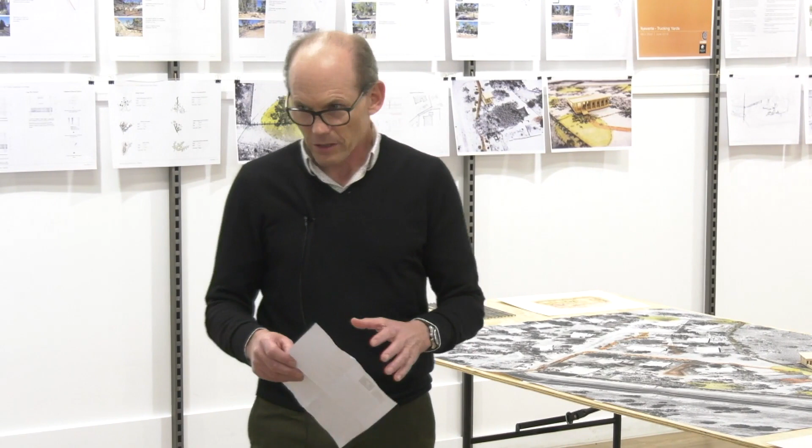So welcome everyone to the fourth year of what we call Essential Infrastructures. It's a partnership between Tangentyere Design and the University of Newcastle School of Architecture and the Built Environment, and it's a collaborative effort that tries to bring together the talents of emerging architects with the visions of town camp residents to try to create better places that we all want.

And of course, it's in this place, in Mparntwe, Alice Springs, that this relationship begins to unfold and come together. And it's here where, of course, we have to pay our respects to the Central Arrernte people and their elders past, present, and future. There's an exhibition down at Araluen, I don't know if you've had a chance to see it.

It just opened last week. It's a ceramicist called Mel Robson, and her work is all about mapping and place. And I think the idea of mapping is certainly something you will see in today's exhibition.

And there's a quote at Mel Robson's show by a woman called Sarah Willard Gray, who says this - just bear with me for a moment. Mapping, she says, is a shared form of knowledge, and therefore provides a common ground between different human cultures, a means by which each can communicate to the other something about their relationship to a certain place.

So it's this idea of mapping, I think, as shared knowledge that seems to capture what this work is and why it's so salient for us. Yes, it's about architecture and it's about community aspirations, but it's also, I think, perhaps something more lasting, something that's certainly elusive.

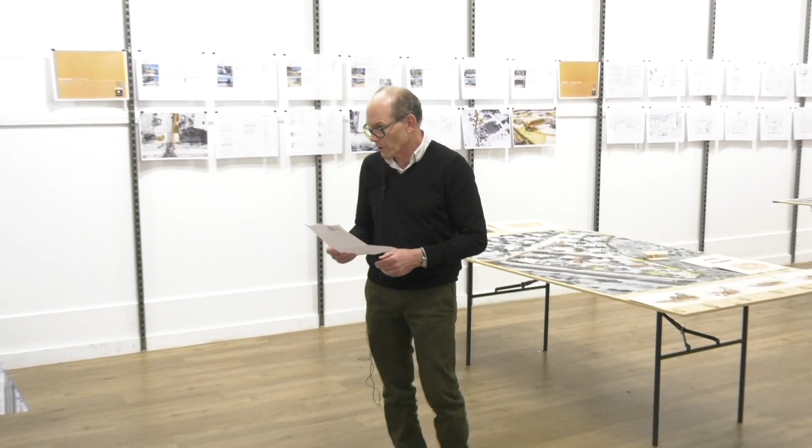We need to thank also Michael Clark, who I don't think is here yet, but he was absolutely pivotal in helping to organize this year's elective. He's got boundless energy, and was critical for bringing it all together.

Wanted to thank also the community center coordinators, Lauren Kenworthy, who's here, and Olivia Wells, who certainly helped to foster the conversations that were required to make some of this happen.

Meg Kellum, who's here as well - I saw Meg somewhere earlier, who opened our eyes to a very provocative view of this place. To Mike Gillum, who again opened the gates of Healy Crescent this year and showed us that the best places are created over time.

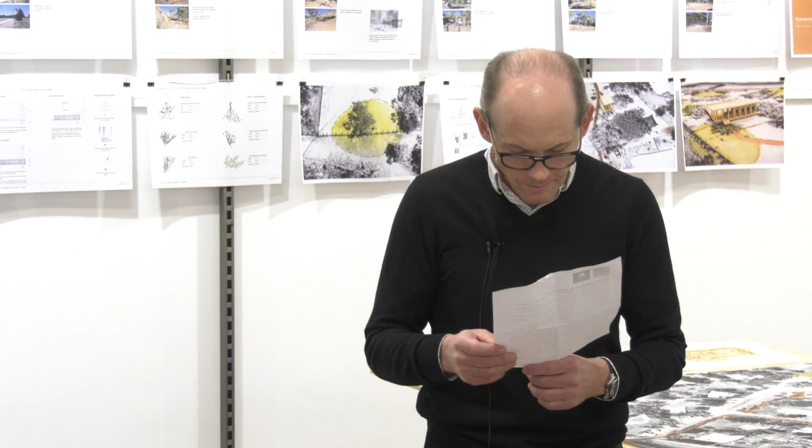Thanks also to Nicole Walsh and the Yeperenye Shopping Centre for welcoming this very unusual activity into this space. I think two weeks ago it was the merchandise outlet for the Finke Desert Race, so it undergoes a few incarnations over time.

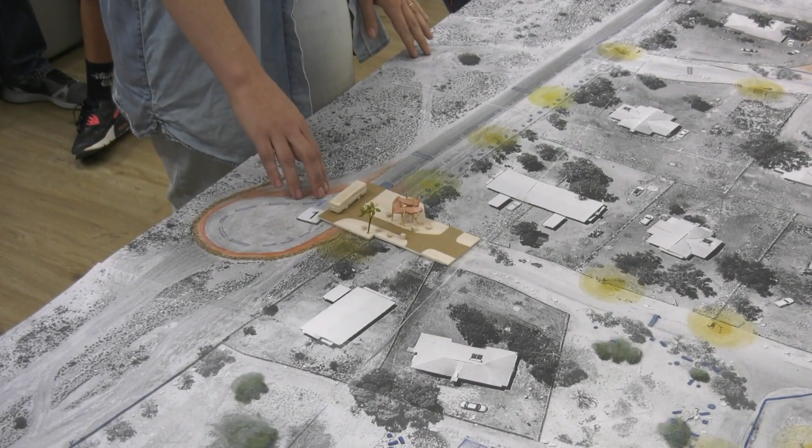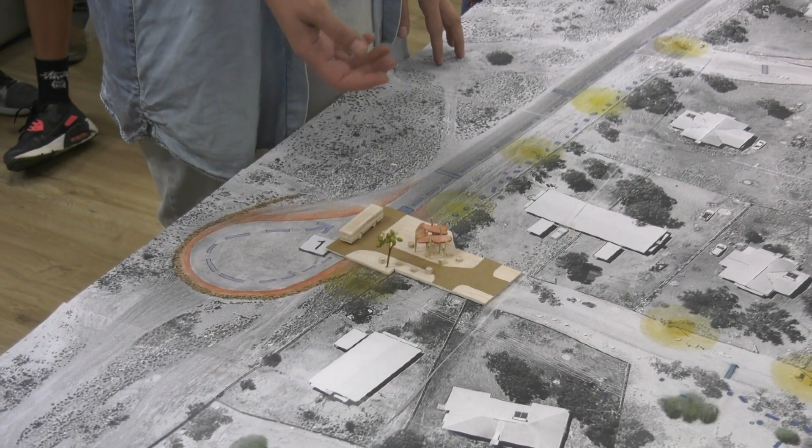What would happen next, I think, is that the Department of Housing is responsible for this road, so they would have to come to site to assess its suitability and make any required upgrades. There shouldn't really be any major issues with getting a bus to come along this road. We've proposed a bus stop here - it's a shelter that sits within the boundary, providing a space for people to gather but also just wait for the bus, while also partially blocking off this road.

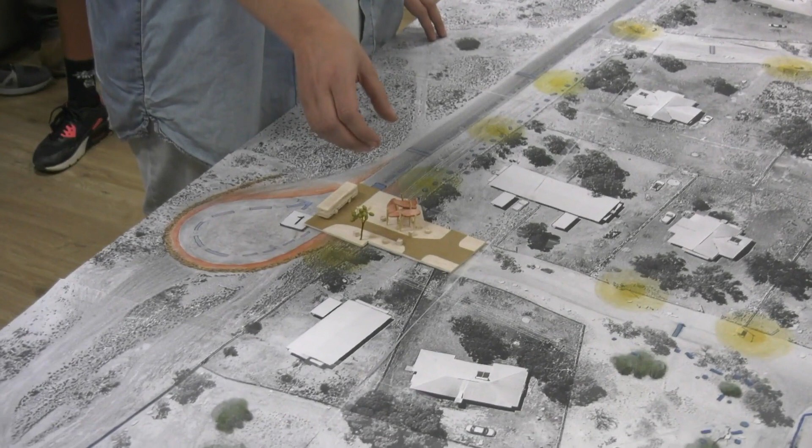Another major issue for the residents was people speeding through the camp. They're coming around really fast and it's really dangerous. So by making this street narrow, we initially proposed blocking it off altogether, but it didn't quite fly. So narrowing it to one way means we've also got speed bumps that have to reduce speed a lot to get through here. Hopefully that will help with the safety issue of the speed.

The next thing we dived into was the community centre. In Karnte, the community centre became a place for women to come and gather and enjoy each other's company, and one of the biggest problems they faced there was people breaking in and burglaries. So they expressed that concern, and we came up with the concept of a fence going around the broader context of the site, around the lot, and increasing security in terms of lighting and sensor lights that come on if people do break into the space.

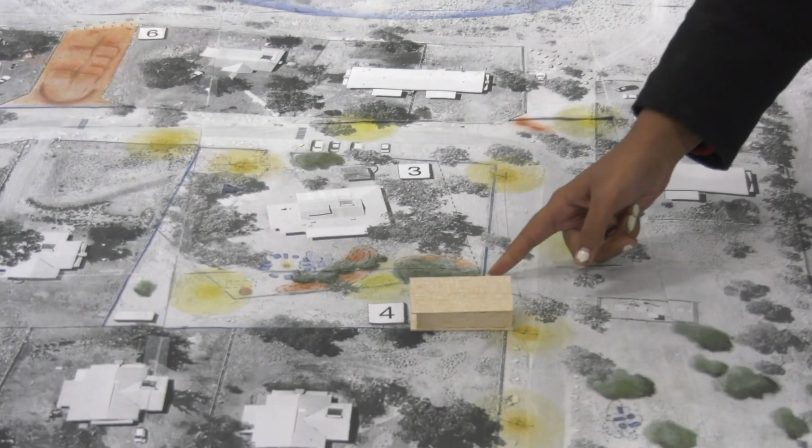Something we did do is there was an existing fence that ran this way, and the men's shed that we proposed didn't exist - it was sort of a vacant lot.

So what we tried to do is answer the need for a men's space as well within the community centre space, so that the two spaces together can be secured more efficiently. We wouldn't have to secure two spaces separately; it's one space that comes together.

To keep them separate, we left the existing fence there, and put in berms and vegetation to reduce sight lines to the community centre, so they're private spaces for men and for women. It also helps shelter against winter winds, so that chill goes away.

We also put a small play area near the community centre. While there's a larger one on site, we thought bubs from age 0 to 3 like to be around their mums, who are around the centre and can keep a closer eye on them.

We put a wood fire oven back in there as well. Apparently the one that used to exist had broken down, and it used to be a part of the community where people came together to cook food. So we reinstalled it and added some seating and a fireplace that's communal for men and women to come and enjoy that space.

So the men's shed, as Amy said, is separate. It's for men to gather, and when the big fence is locked, the men can still sit out on the street and watch what's happening, so it's still usable space. It's just a multi-purpose building with a toilet and a washing facility for anyone, as well as a kitchen.

When we went to the town camp, they also expressed how they had a lot of street lights, but most of them weren't working. So we proposed those get fixed, as well as adding some additional lights close to the community centre and along the main road.

Also, as Chloe mentioned, they said there were a lot of speeding cars around the camp. So we decided to add some speed bumps, as well as a pedestrian crossing across the community centre, because a lot of kids play around that space.

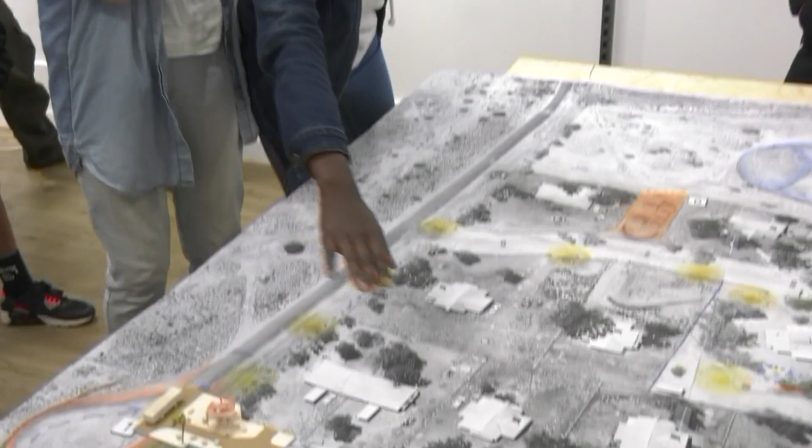We added some concrete blocks that also served the purpose of seating, and we did that across the whole side, in these spaces and on the southern side.

There was also some fencing that wasn't working anymore, with people taking them down and moving their cars around the space. So we proposed that gets fixed across the reserve area, and also added a fence around the southern boundary.

Also on this, when we went to site, the community expressed a need for sports facilities. So perhaps in the future an AFL oval, a full-size basketball court, or a smaller playing space. These spaces bring the community together.

There's also a BMX track here—the camp already has a BMX program where they take kids off-site to learn how to ride BMX. This was just a dirt road, so now it can be fenced and become a space for them to practice riding.

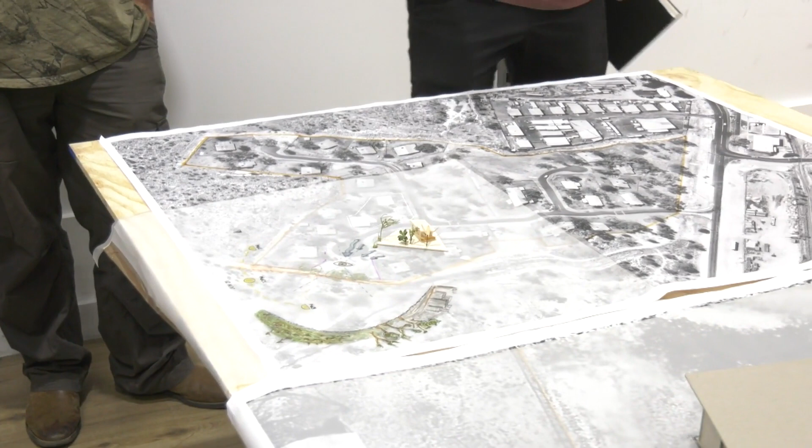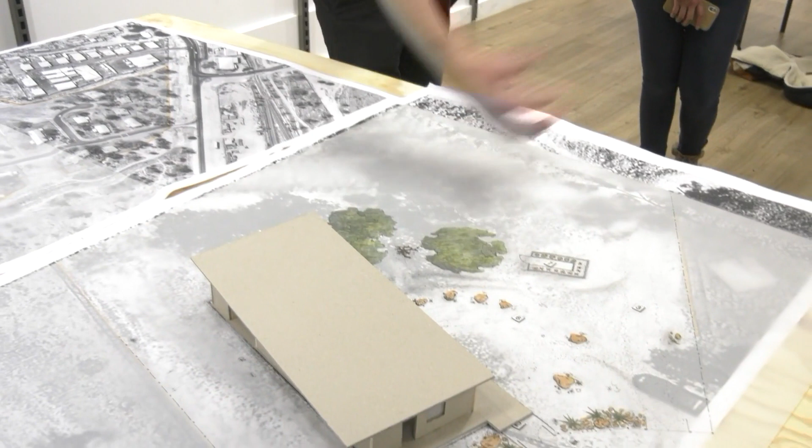This is the site, this little model, and there were a few main factors we looked at. One was sightlines - we wanted a bit of sight out to the street, which you can see in the window at the front of this model, but also sight out the back. By locating the shed to the boundary, the neighbouring fence, we maximised this outdoor area, an idea actually presented by you guys. We really wanted to maximise this space and the great view out to the surrounding landscape.

That was also beneficial because of the north - the sun, making sure it's nice and warm in winter. That led us on to how to also control the sun in summer.

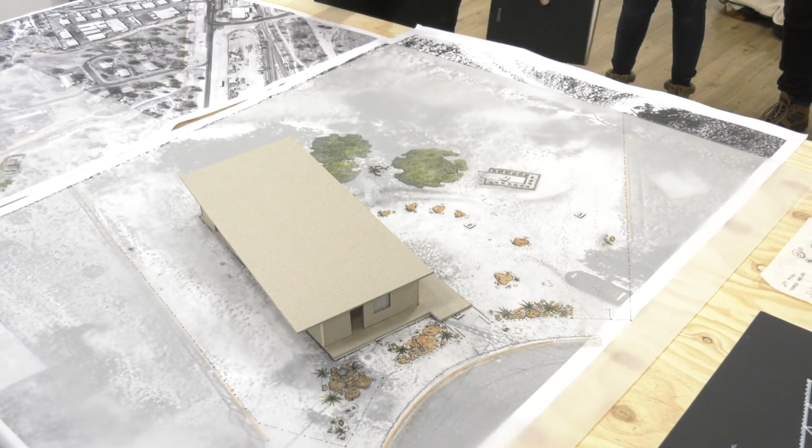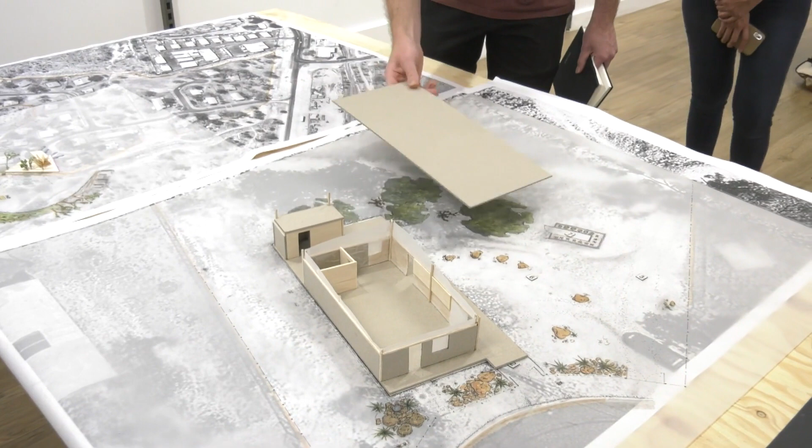As you can see the form here, we wanted to do something budget-conscious, starting with the basis of a shed - these walls here - but adding something extra. By using this peaked roof, we're trying to bring the cool air from the ground up through the top, keeping it cool in summer, and these possibly Perspex windows bring in light, so it's a nice open space without using too much light, saving electricity costs.

So that's basically how we orientated the building.

I'll have a crack. One of the complexities and interesting parts differentiating this project from some of the other more mapping projects is that it's a building on a site. One of the differences is these guys wanted so many different spaces and activities in one shed. The exercise was to ask: how many activities do you want, and how can they interweave and interlock with each other?

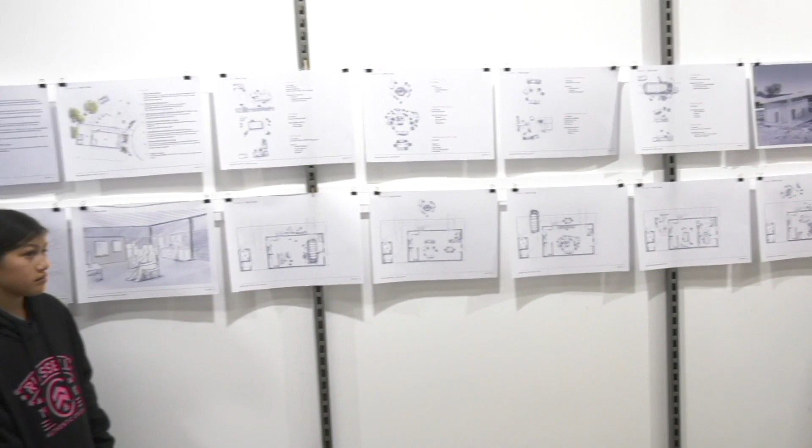How can a workshop space double as a gym, or a large room where all the blokes can watch a game? All of that was arranged through exercises - you can fit a car in there, a Land Cruiser or troop carrier, but also have a couple of guys tucked away in the corner having a quiet chat. It's a safe space where they can do whatever they want and be away from the community if they wanted, but still have a nice connection to the community.

So we did go through how this is going to be built. The nature of these projects is that budgets are usually quite tight, so we wanted to make it practical to build. We wanted to make use of the construction materials and construction skills that these guys have, like Will, Lazarus, Anthony, Tyrone and John - landscaping, boiler making, carpentry. So we designed it to be an efficient use of material for them to build it easily in their own time.

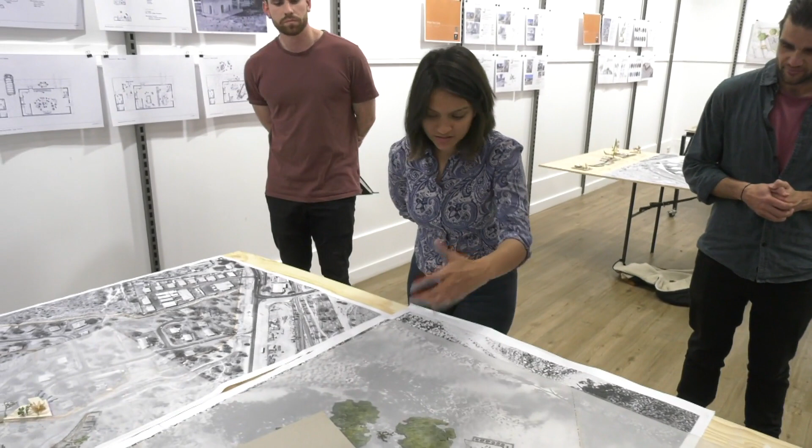And the space at the front as well - it's situated in a grid, so there's opportunity for future expansion. It's really just the beginning of the space. There's so much more you can do with it in the future.

So being so flexible, obviously this is open to what people are wanting to do on that day. So all these drawings are just our testing of what fits, not really suggestions, but our studies of how the space can and might be used.

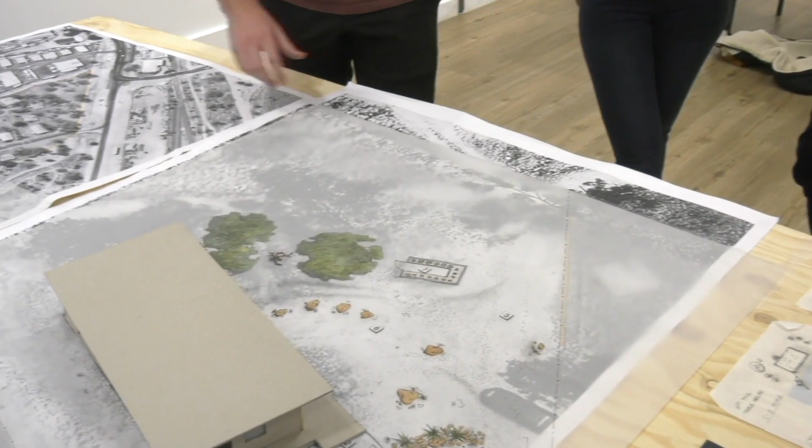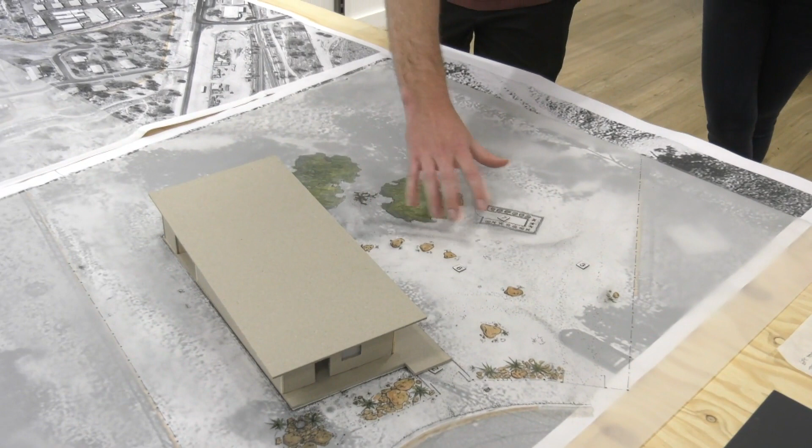In forming some of this landscape, we considered the existing roadway, since the site is near a floodplain. We thought we might utilise that roadway and possibly put some rocks in so people aren't driving right through the space where we were thinking a fire could go, and a veggie garden was mentioned. By putting these rocks there, that could keep the cars away.

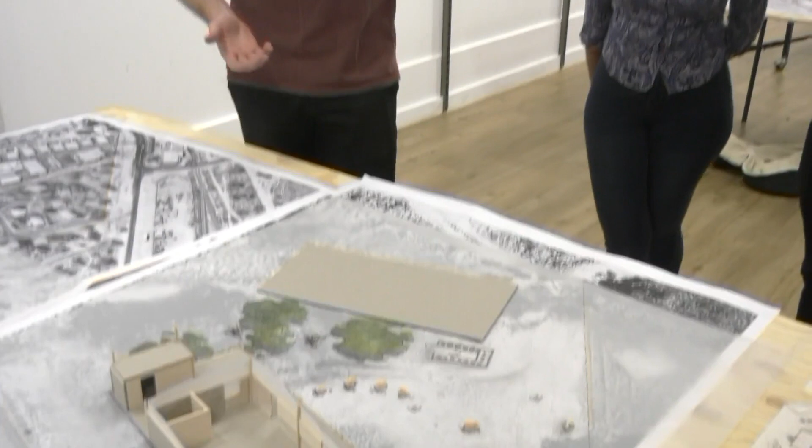They could actually drive around and go into this space or into these doors. The doors could be opened up to keep it nice and fresh and bright, or closed down. People could retreat to the side if it was a more informal, quiet chat, or even a formal chat with social workers or counsellors.

We suggested the possibility of using partition walls, rolling walls that could easily divide a space if required, but they're not set - so, ultimate flexibility basically.

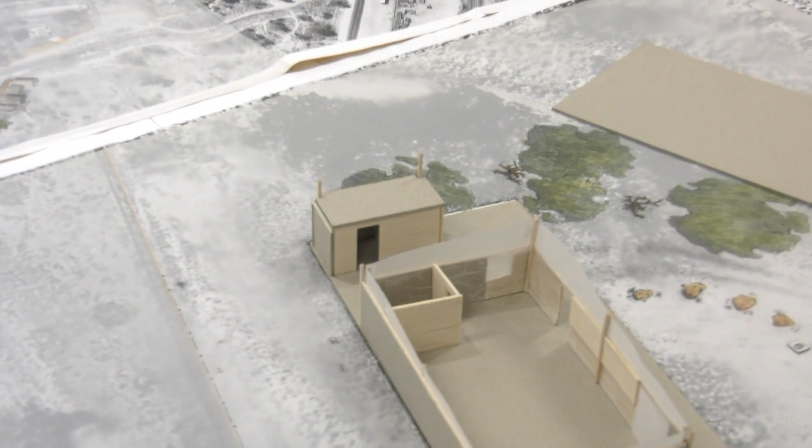This little substructure at the back was the potential for a toilet and a store. The store was quite important given how much sport and music happens here. We thought, or they actually suggested, having it outside so you don't have to go through - if something's happening, you don't have to disturb anyone, you can just park, walk, get something, and come back.

But being on a budget, we contacted some local shed dealers - part of the point of having this as a corrugated shed at the bottom is you can keep that quite cheap, so you could possibly afford this toilet. But if that's over budget, you could put the plumbing in, and as these guys have the skills, install it later once there's more budget.

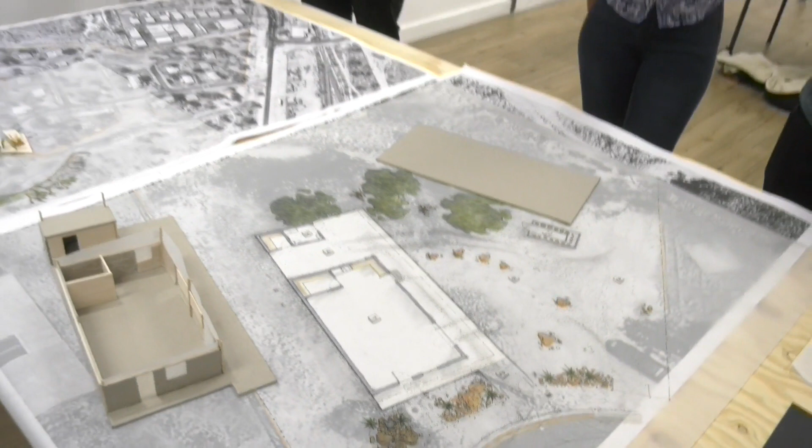There's a bit of a plan underneath too. So being as open as possible, all this veranda space can be used. If you get time later, you can see how much you can fit - people playing cards, all sorts of things.

Or build your own shed - there's an exercise here where you can arrange your own shed space. Throw a TV up the back room, fit 20 people in there, or vice versa. Just have a bit of fun with it - that's what we really wanted to do. So yeah, thank you.

Are there any questions? You're talking a little bit about costings and who's going to build it. Have you done a costing sheet, or gotten more into the technicalities of that work, or has that not come through yet? Like actual reports you think? Just if we were going to develop a funding submission, I guess it's to have a sense of where you guys are up to.

We were at the beginnings of getting the construction handbook, which has price per square metre, so we're getting ballpark figures of all these kinds of things. We did contact a few manufacturers, but they just want to see drawings for a quote. You're trying to get a ballpark figure, but they want something set in stone, and given the time frame, it's still in a concept stage.

Until you agree on the space, you can get it more formally priced. So we had it as a beginning look, and we always designed with budget in mind. The next step would be getting it more formally priced up, which we'd be fairly confident in. We're quite confident in the spatial arrangement and the area accommodation, and that would meet a funding application.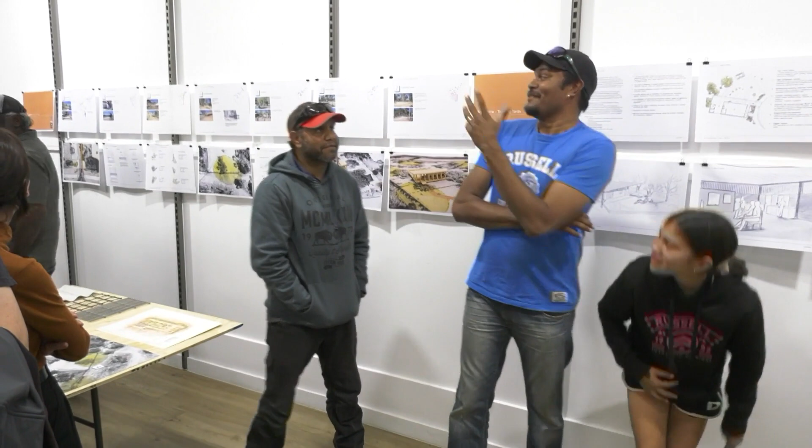No, it's a great idea. Like you were saying before with our basketball program, we all start off small. We utilise our skills, and the basketball program is actually growing now. We started off small and now we've got people from elsewhere, funding agencies, and people wanting to get on board because our program's had some success. So yeah, that's why we talked about the flexibility.

In our town camp we've got a lot of skilled people living there. We've got builders, carpenters, school teachers, or family members of that, mechanics, and all that sort of stuff. So that's why we wanted that flexibility, so we can run those programs throughout. One time we might have something to do with mechanics, next time there might be an idea with landscaping and all that sort of stuff.

So there's flexibility there. We also wanted an open space, because we want to balance both worlds, the cultural world and the Western world, in regards to working and all that, but keeping our culture there. So when we go out hunting, we can bring it back and show the young ones the right way to cut up, but also feeding our other family members on the town camp. It's all about flexibility and starting small, and like we said before with the basketball program, who knows where it can go.

It's great. So yeah, thanks.

Hi, my name is Jack. This is Alex and Callum, and we were working alongside Robert looking at Ilperingho, Old Timers, and more specifically looking at the edges and community safety and how can we make a secure camp.

The way we were approaching it was, thanks to Robert, we went around the whole site and started photographing and documenting the issues or concerns we had, and through that documentation we started to sketch out and figure out solutions for what a fence is, how we can play with what a fence can be, and the layering within that.

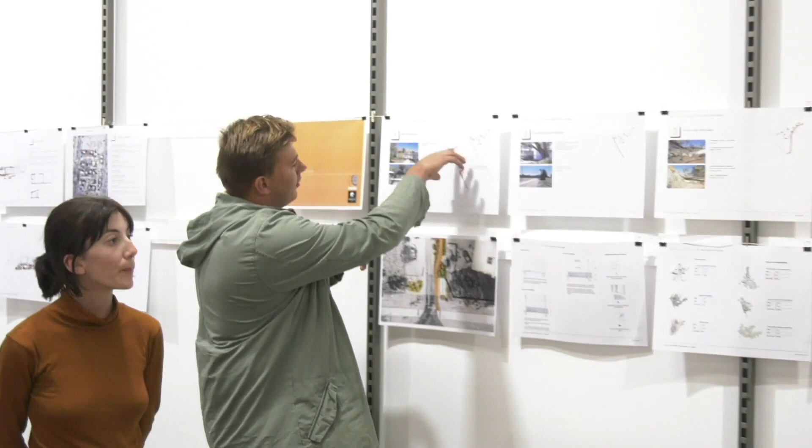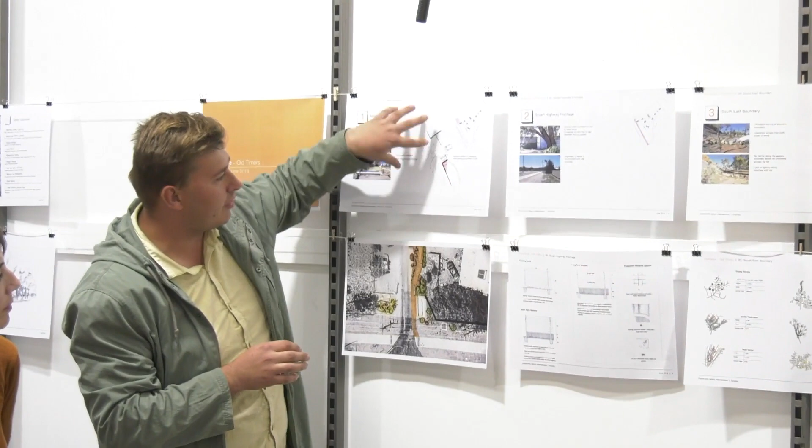I think we'll just go through the numbers. The first phase was looking at the entryway. At the entry, there were issues with too solid fencing and you couldn't have any visibility down the Stuart Highway. So it's about how can we start changing that fence, cutting away those solid fence panels so you can get clear views down towards the south of the highway. We started looking at that, and then having low-lying landscape and rocking to create an inviting entry.

Like Jack mentioned, security was probably the biggest and most pressing issue at Ilperingho. So the way we approached our strategy was to have a short and longer term solution - something that can happen quickly and be quite cost effective, and then a solution that can evolve from that and make the camp a better place overall.

Another key issue was this fence. Fences were a big part of our project, and there's a major frontage along the Stuart Highway that's currently just typical Colorbond solid fencing. It gives a bit of privacy, but there are issues with not being able to see through the fence to what's on the other side. It's also spanning longer than it should, so the lengths of the fence and the placing of the posts don't quite work structurally.

In the short term, we thought we'd raise up the posts and extend them to lift up the solid fencing, and put some kind of grid mesh in the lower part of the fence so you can see people walking underneath - that improves security along that fence a little bit, but still allows for some privacy. Then in the long term, we've come up with some strategies for keeping that existing structure with the extended posts and the grid below.

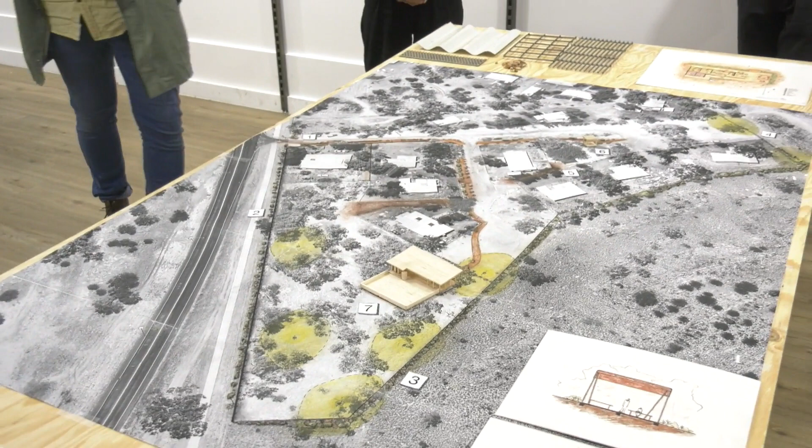We've joined the fence from the south all the way up to the east, to the northwest corner. But instead of just putting a fence and letting that opportunity where people might jump over or find ways to get through, we're making a succession or buffer, using landscaping and rocks placed through.

By changing the ground level and digging it down just along the fence line, and planting prickly shrubs and low-lying dense shrubbery, specific plant species like acacias and grevilleas, it allows the difficulty to get through and beyond the fence. So we started addressing that, and these sketches visually show that.

What we did was move the fence slightly backwards from where it was existing and then extended it, but allowed a metre or so of planting along the hill. So we shifted that boundary a little bit, but kept it within their boundary for the planting and landscaping.

Up here against the northern edge we've got the Todd River, and right now this is completely accessible, but right next door is Fort Knox in the Old Timers retiree home. So we had this cheeky idea where we'd use the exact same fence and do it on the cheap, just this little section, to give the illusion that we're part of the same compound.

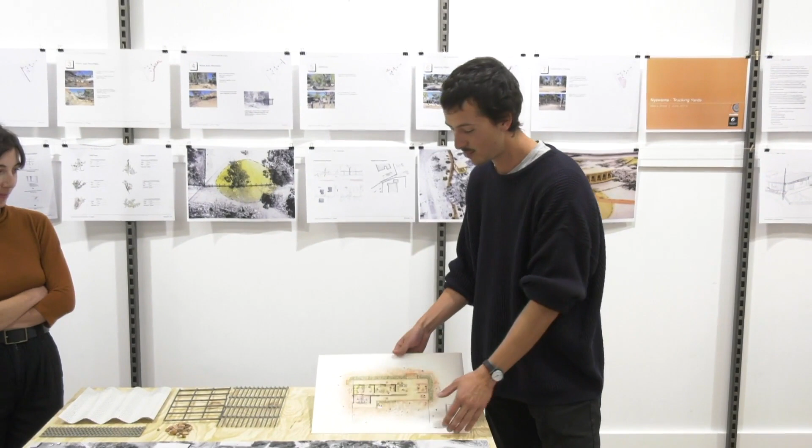So looking at what we can do here, pretty much every time we talked about what kind of building they want, it's just about having a big hat, to keep the sun off. And so this has got a big hat.

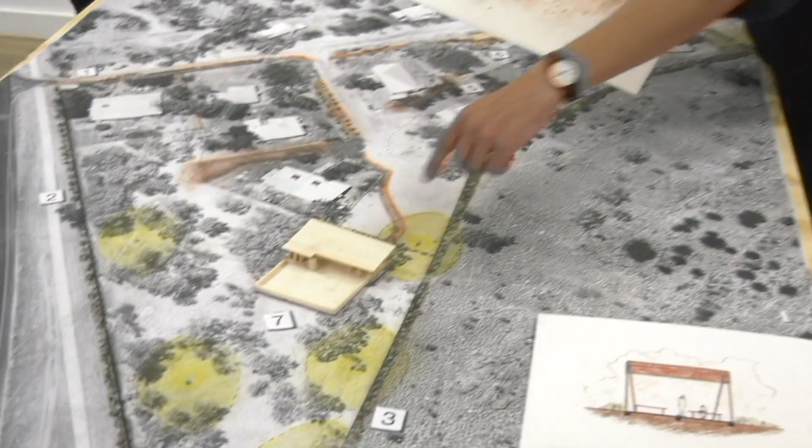This is the model here, and you can see what we've done: you approach from the north, come through, and this is a big open space. Barbecue here, and then on really hot days you can come inside to this mixed use and kitchen space, which opens onto a big nice door.

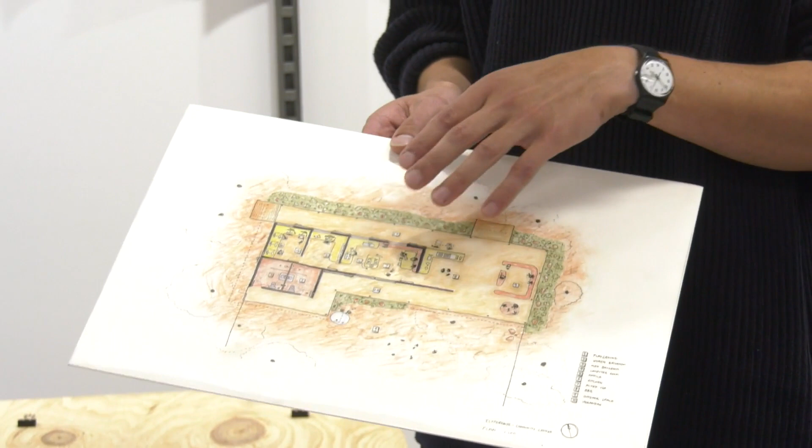You've got the office room for people taking care of the centre, and then the computer room up the back. The office, situated between the kitchen and the computer room, gives a bit of eyes on, so no one who doesn't belong to the centre can come in and muck around. So there's a bit of privacy there.

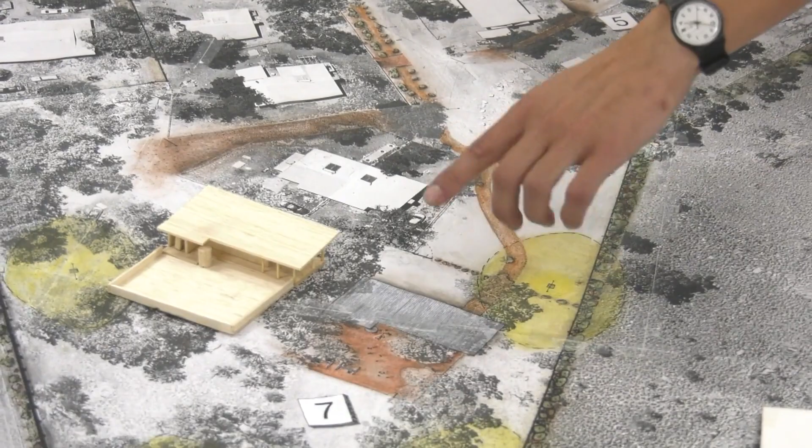Then we thought, actually what would be best is if we've got the community centre up the back, that's where the kids should be, because there's no point having them where they are here. So the long-term solution would be to bring the playground to the back of the community centre, and bring the fence such that if any kid wants to run out, they've got to pass through all the aunties.

So you'll be able to grab them, send them back in. And because this spot here, which is a bit of a natural centre, doesn't have the playground anymore, we thought about making a meeting place. Well, we didn't think about it, Rob thought about it, and we said, that's a good idea.

And so, essentially they almost don't need architecture to have a meeting, but they do so, and they get a hat. So all this really is, it's just a hat, and it just formalizes sitting around, having a yarn, talking about it day to day, but also if bigger groups come, you've got a kind of natural circle, which is the way people just naturally form. And then you've got seating and you can stand behind, tiered, so everybody can have their eyes on the person in the middle, or you're just sitting in the shade, somewhere cool, having a yarn.

To get your bearings a little bit, this is Hunter Road and Stuart Highway a little bit over there, and Hunter Camp is to the south.

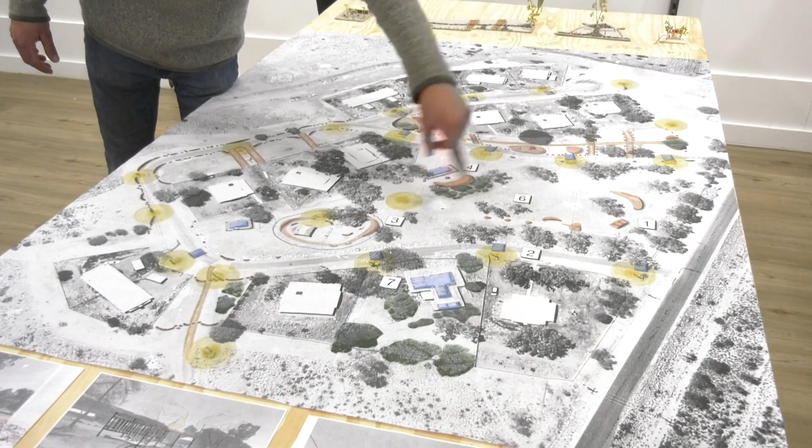So the first main issue from our meeting was that there were no barriers to stop cars from coming onto their public space. We think part of the reason was that the lot size is so large and open that there are many different openings for cars to get in. If you look at the map, you can see all these different tracks that cars have cut through the public space. They were concerned they couldn't inhabit this public space and feel safe, and that their kids couldn't be in the playgrounds without feeling safe either.

So we started looking at different ways of blocking cars - an external perimeter - and we looked at all these different types of barriers. The community said they wanted steel bollards everywhere, but when we measured the distance we needed to block off, it was a little more than half a kilometre, and getting quick material costs for steel bollards was pretty excessive.

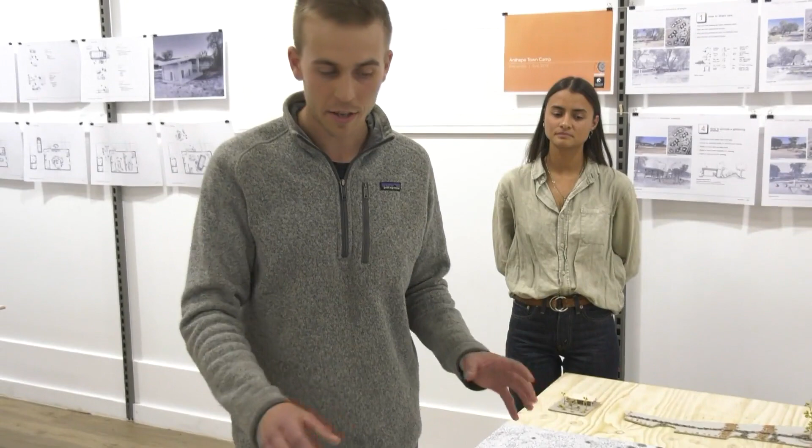So we started to look at different waste products or recycled products. We looked at tyres with rammed earth, and we also took a lead from previous years and looked at the same concrete block solution. We also called the tip in Alice Springs and found out they had steel we could recycle to create steel bollards at a much lower price. They're also excavating, so we could use some of the quarried stone to create a new set of barriers. So what we've proposed is a combination of these different solutions to stop cars, based on the different costs and grants allowed for the site.

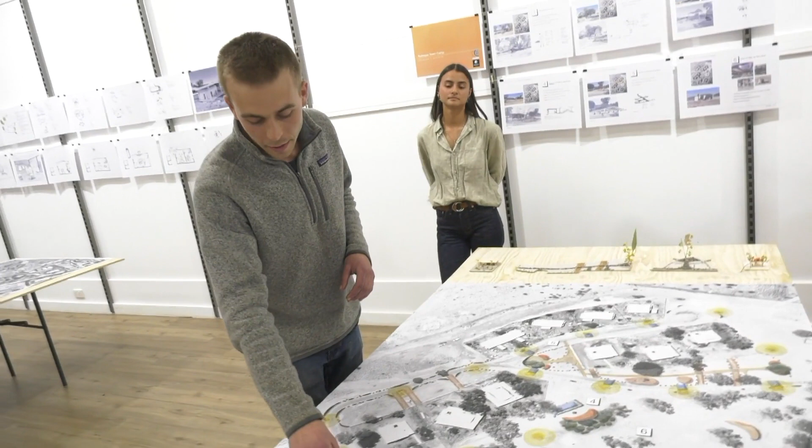The next point was that cars are coming from the outside in, but also flying around the road on the inside, and people felt unsafe accessing this public space. So when we had a look around during the mapping process, we started to think about what these streetlights were doing at night time, and noticed a lot of them were broken, presumably by slingshots from the kids. We thought we could use this existing infrastructure and add a safe crossing — a speed hump combined with an accessible pathway at every single streetlight, so at each one there's a safe crossing from your house into the public space of the park.

The next issue we talked about was keeping children safe in the park. This park already exists, and the kids have made this pretty amazing BMX track. There were concerns about keeping the children in, keeping dogs out, and also keeping cars out. So the community wanted a fence, one that they could see through to maintain visual surveillance of their children. So we've put that in.

We've also made use of rammed tyre walls inside — they offer something you can play on but also hide and play with your friends and look out from. On the rammed tyres, we called some places in Alice Springs and got in contact with a tyre place willing to donate their used tyres for free and even deliver them to communities, completely free of charge. There's about 50 million tyres a year in Australia that go to landfill, so that's a really good option — using soil from the site and getting people engaged through CDP to fill those themselves. It doesn't require much skill or training, and it's a very effective method.

So we thought that was a really good option — affordable, and it gets people involved in the process as well. The next thing we looked at was providing a gathering and shelter space.

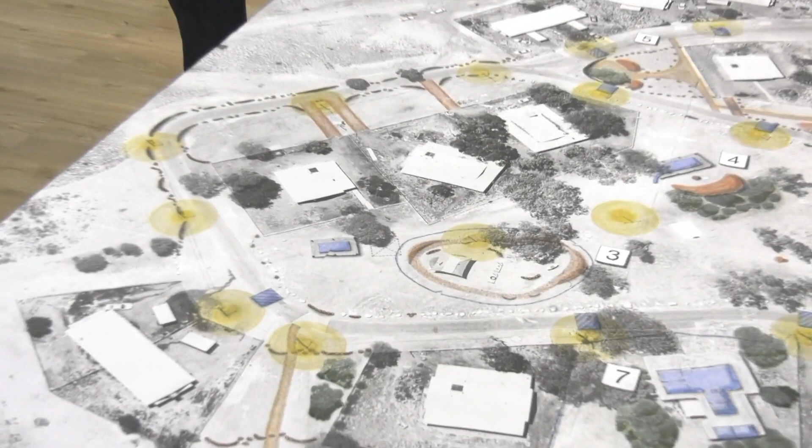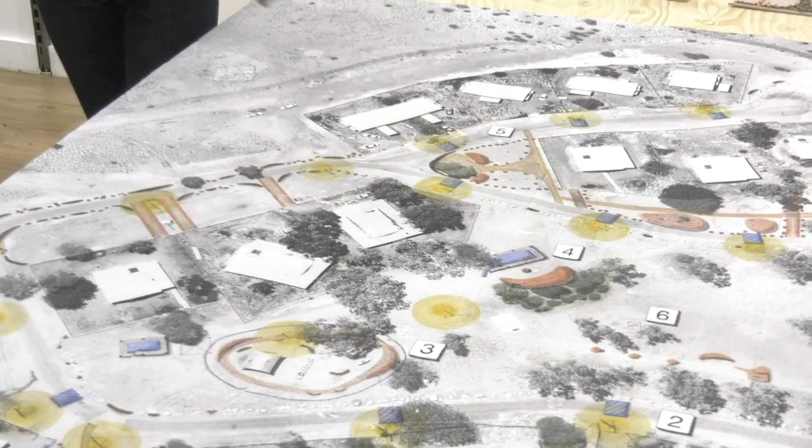There was already an existing shelter space here — it was quite derelict, but people liked the idea of it. So we proposed to reinstate one in the same spot, and also build a larger one on an existing slab, utilising that slab and introducing services like water. They wanted to be able to prepare roo and cook there, so we have a hearth, a large roof, a kitchen sink, a big bench, and a hose connection to easily hose off that area for cleanliness.

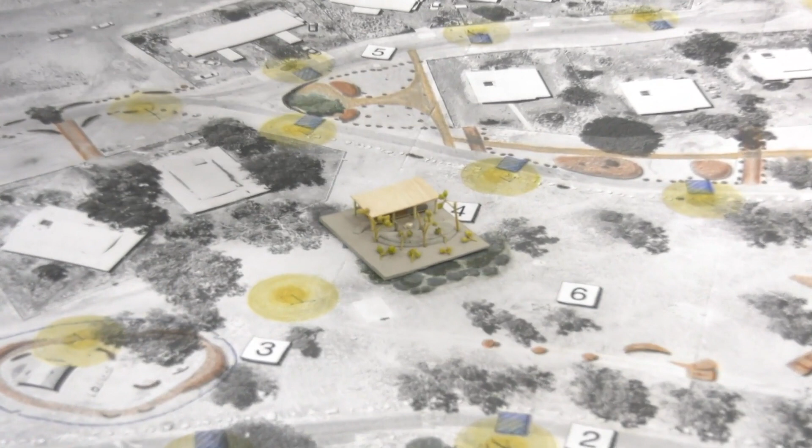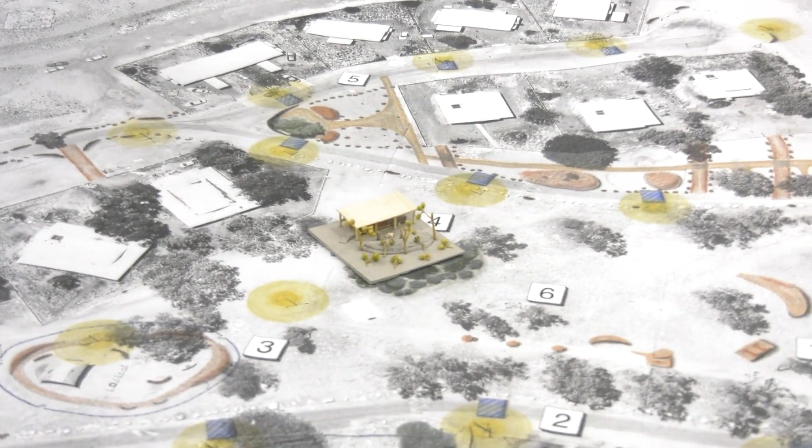This is a little model of the structure. The idea was to use a very simple steel framed shed that provides shade during summer, during the middle of the day, with vertical louvers to the northwest to stop the afternoon sun from hitting. We combine this simple steel structure with landscaping — a large berm to the south and southeast that bounces the cold air over the top, creating a nice sheltered space underneath the roof, and a nice outdoor space around it where you can sit on the berm. There's a campfire — simple, cost-effective strategies to create very usable outdoor space for people to gather.

One of the next points was a byproduct of the cars going all over people's front yards and everywhere — the ground had depressed in parts, and it was causing flooding to the front of people's houses.

So we started to look at that and see if we could turn this into our own advantage. The idea we came up with was maybe it's a good thing, considering the dry climate, that water is pooling up somewhere where it rains. So maybe we can reshape this public space into a central drainage channel, and the flooding could create really nice landscaped areas with informal seating spots.

So the idea was to reshape the contours of the land and drain the water away to new plantings and berms, and also water the existing trees. We work hand in hand with these berms, so there'd be nice little meeting spots around areas with big healthy trees growing and different pathways that you can walk.

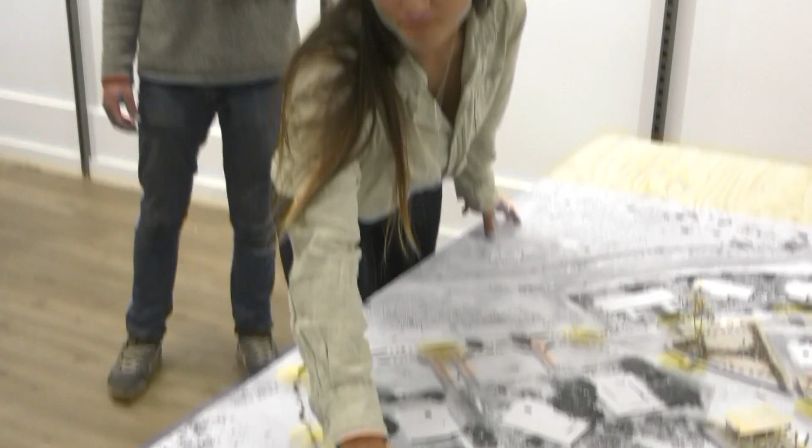We also decided to do that here next to Rosemary's house, and she was really keen on the idea of citrus trees. So if we could do that, it would be really amazing for her to maintain and hang out there.

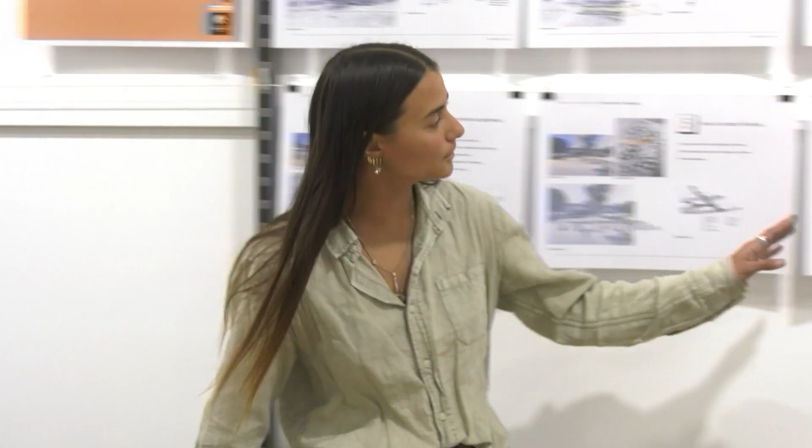The last issue we noticed was that the camp had quite a lot of bits and pieces left over - services, ruins and the like. So we took some photographic evidence of all these things. There was an existing playground that was a bit derelict now and a little bit dangerous, so we're just removing all of that and tidying it up.

There's also the opportunity here to use some of this demolition material, such as slab and rock, inside the rammed tyre walls. So that's a good opportunity, instead of just throwing something out, to reuse it again on site.

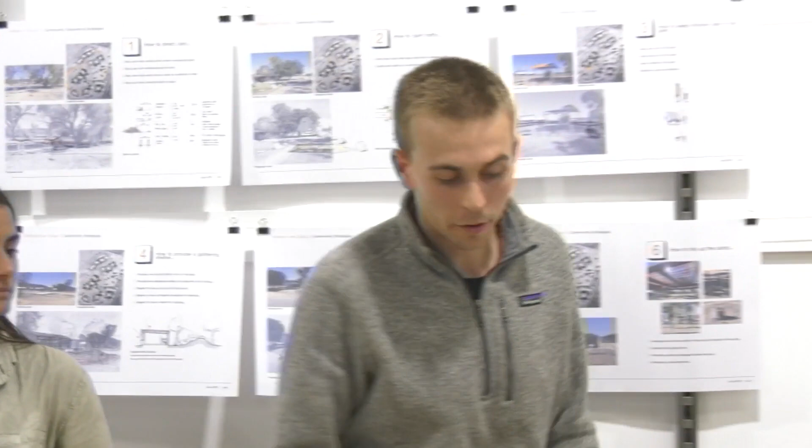And a last point, riding off the Canter camp's great work with the bus shelter - our camp isn't serviced by any public transport. So the bus runs up this road, and we've proposed the same bus structure, which will work together with all the different camps to create this uniform public infrastructure.

The one thing to note about our master plan is that the boundary actually cuts onto Canter Road here. So part of the argument is that we've got to allow for road widening down here, so that the bus isn't coming onto the town camp's land.

And just one more thing about the community - it was something we noticed quite early on, that there was a really strong sense of community, and it wasn't just the adults coming to talk to us, the kids were really excited as well. I don't know if that was because of the oranges and biscuits, but anyway, they were really excited to give us their point of view on certain things that maybe the adults hadn't noted.

So it'd be really good to give back to this community and capitalise on the opportunities here, making this a nicer, safer place for them to enjoy. Yep, that's it. Thank you.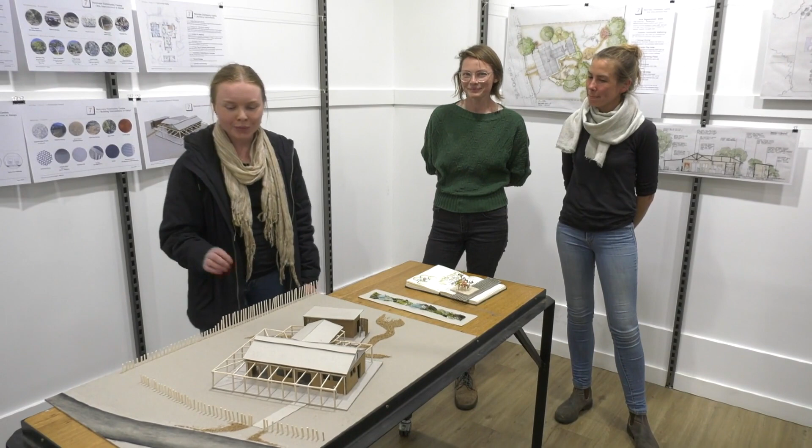Okay, well we might move on to the community centre, which is part of the camp. My name's Angela and I've been working with Eloise and Hannah on the community centre, which is a project within the overall Ndapa community site. The community centre is located just down the bottom here.

We've been working with the existing church site and the community consultations, and they've expressed that they would like to repurpose and redesign it into a community centre. We've addressed some of the issues and assets that come with this site, including security, which has been a big part of it - at the back of the site and along the sides, as well as within the materials used on the building.

But overall, it was a really good site to work with. We have a north-east alignment, so that's going to bring in a lot of good lighting and sun. And it's also a really good slab and existing structure that we can reuse. We also have really strong community support to get this up and running again. In the past it's been a church and an education centre, so we've tried to keep it flexible for reuse of the space in the future as well.

But the main spaces they were looking for include a meeting space, somewhere for a range of activities, which we can try to do with a flexible open space within the building, and a kitchen and a laundry, and potentially some showers and toilets at the back of the site as well.

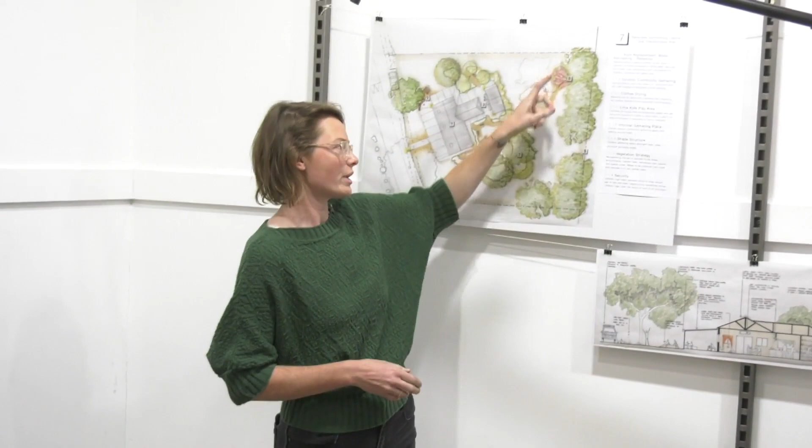So we've proposed a 2.4 metre high fence at the rear of the site, which provides security coming over from the south from Kunta Camp. That continues down both residential lots, and then phases into, as you can see in the model, the pre-existing chain link fence, which returns to that more residential scale.

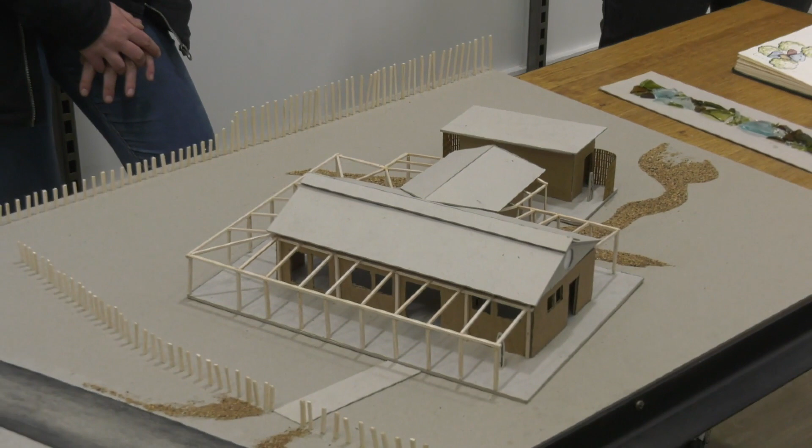So what that does is, if people are coming from the south of the site, they're encouraged not to go over the back fence but to come around to the front, where if they are wanting to come into the site, it can be seen, and the local residents who live here can really see who's accessing the place and control who's coming and going. We really hope that will help mitigate some of the disrepair that occurred on site in the past.

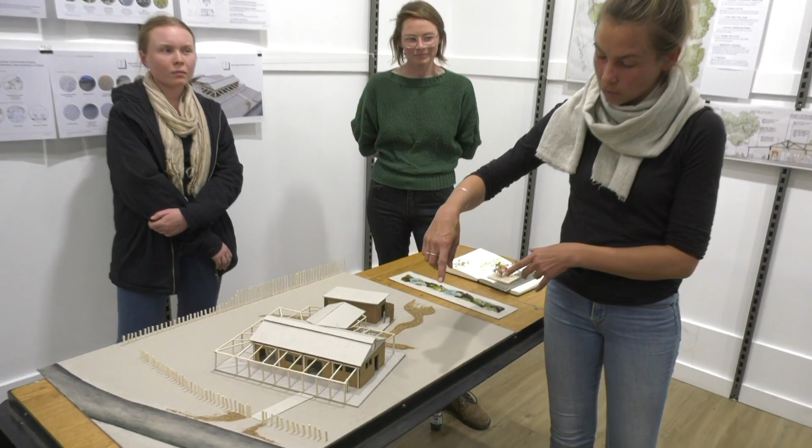As Andy mentioned, the existing building has great assets in that it's got a great concrete slab, block walls, and a steel portal that can all be reused and tied into the new structure. As Hannah mentioned, the roof is probably the main thing that really needs to be replaced. It's causing structural damage at the moment, so we're proposing a new roof and new verandas that wrap right around.

These will facilitate gathering areas and have a nice place to sit and have a chat, but also in summer be able to sit in the sun with the sun coming down low, while being shaded in winter—sit in the sun in winter, but be shaded in summer.

We also looked at getting good ventilation through the space and up and out of the roof, and to relocate the main large multi-purpose space for this community centre to the northeast of the building, so that it has better climate control, with more solar access and exposure to the sun in winter.

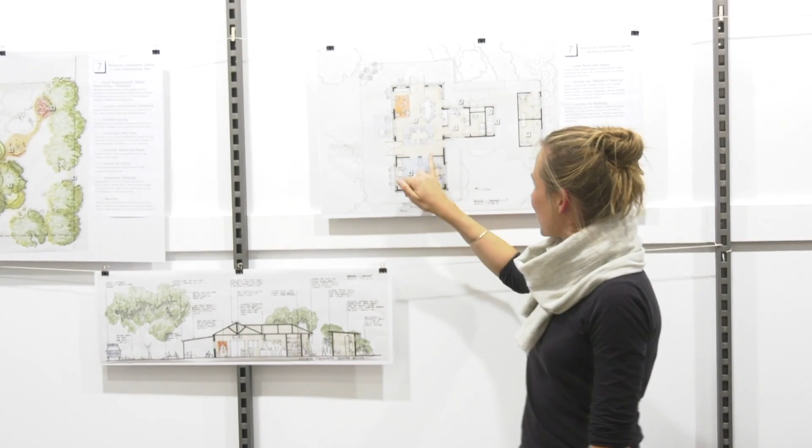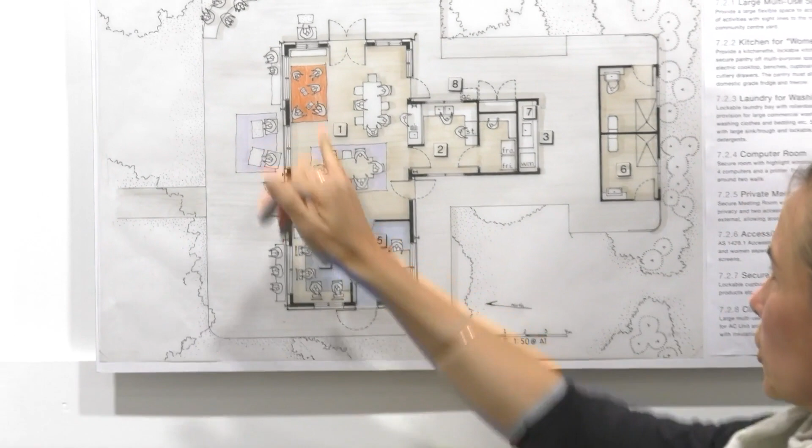So we created a large flexible open plan space, which you can see on this drawing here. This allows a gathering of people, as Rosemary and Reedle expressed, a space that could cater for 15 to 20 people, but used in a series of ways—a gathering table, people working on art, or kids on a rug reading books. A really flexible space with access and sight lines out to the main public spaces on the road, and you can flow out onto these verandas, which really become an outdoor room as well.

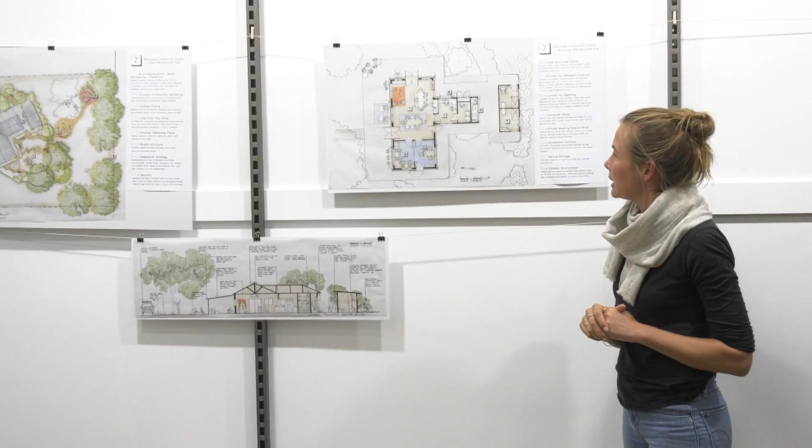The next thing they raised as a concern was that they really wanted to get the kitchen up and running again, with a space for women cooking and a lockable pantry off the back that has a fridge, freezer, stove and adequate storage.

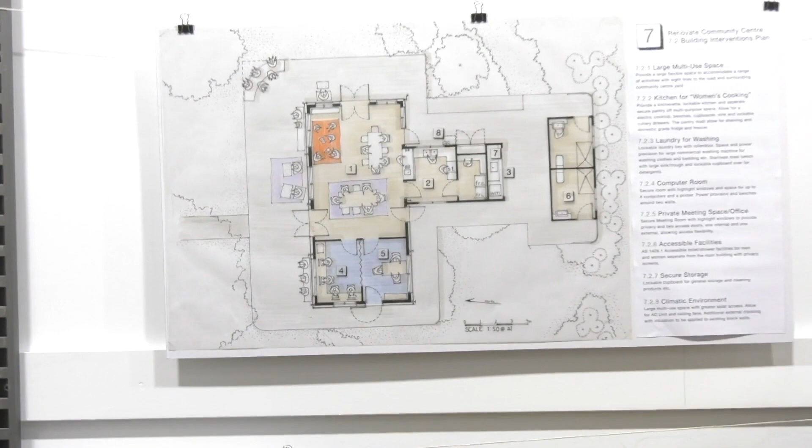The next thing we discussed was a laundry. So at the back here we've got a laundry, so family members and visitors can wash clothes and bedding, and as Hannah expressed, a washing line here which is easily accessible, allowing that function in proximity to the kids playing alongside.

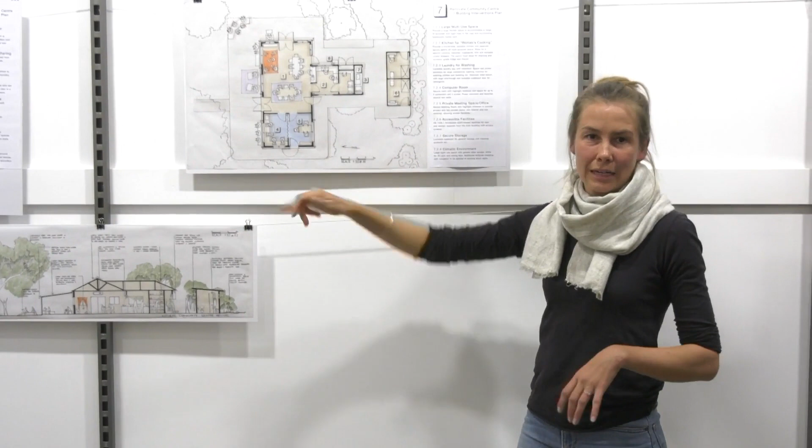And then they kind of expressed really, I guess, wanted a quieter, kind of smaller room which we thought could be carpeted and somewhat flexible as well. So on the left-hand side we've got a computer room which is a smaller space, and then also a private meeting space which has a door coming off the main space but also access externally so people can come and go and have private meetings there, for a gathering of maybe 3 to 4 people.

These are highlight windows, so it provides privacy and somewhat security. And these verandas wrap the whole way around the site and lead back into these accessible facilities at the back,

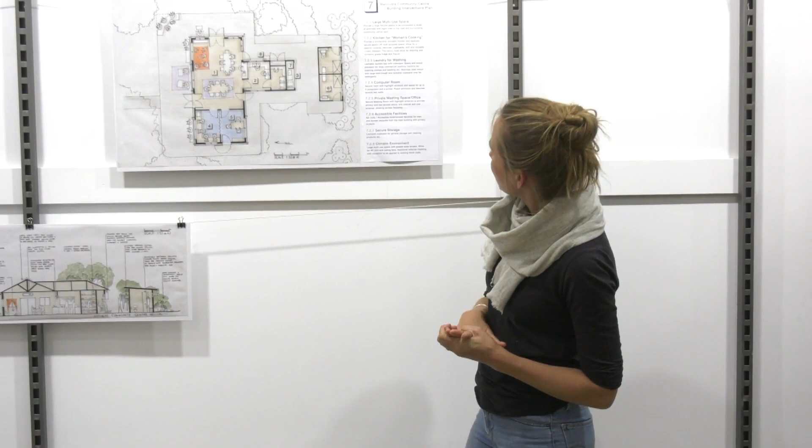which include toilets and showers. And also there's a secure cupboard here where they can lock up equipment and also cleaning products and things. We've also allowed for air conditioning and heating, and all in all we wanted to provide a really nice large, multi-flexible space and revive this community centre, which has great bones and wouldn't take much to get it off the ground again and functioning for the Unduppa community.